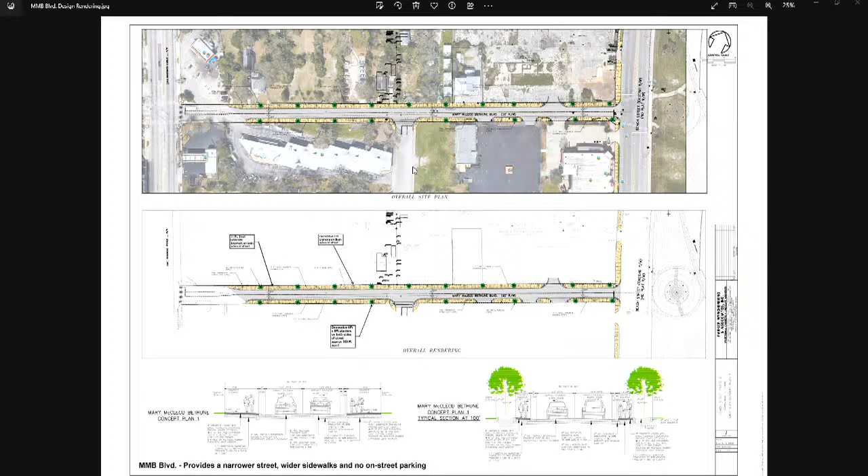Conceptually, this will be a streetscape project similar to what is in Phase 1. One of the big items will be reducing the lanes from 4 lanes as it currently is down to 2 lanes, with traffic calming associated with that. Beach Street will be converted to concrete pavement just like Phase 1.

Additionally, one of the major features will be pedestrian-friendly sidewalks. We're going to look at getting 12-foot sidewalks on both sides of the road, similar to the shell concrete that's in Phase 1 along the riverfront park. We're probably not going to be putting in paving blocks for sidewalks like was in Phase 1.

There will be accents at the intersections with pavers for the crosswalks, at Bay Street and at MMB. And also, we've got a mid-block crossing close to Brown and Brown that lines up with Manatee Island and the nice restroom facility they have right at that location.

One of the other major features of Beach Street Phase 2 will be the raised median island, just like in Phase 1. That was mentioned repeatedly at the public meetings and workshops with Commission, who wanted to go with the raised median island with the opportunity for landscaping. So the thought process is to continue with the palm tree theme from Phase 1, whether those be medjool palms or another type of palm. We haven't finalized that yet. We want to make sure it works with the Riverfront Park landscaping.

One other feature, we're aware of the development at 400 Beach Street. We've been monitoring that and talked to the designers of that project. We're monitoring the submittals as it goes along in TRT. What's going to end up happening is they're probably going to be building first, so we will adapt to what they're doing. We're stopping short of Michigan Avenue, so any access to the parking garage for them will be okay, and we have a median cut through off Beach Street for their parking garage entrance.

We will also be revising the lighting out there. We'll be taking down the existing concrete light poles with the cobra heads and going with nicer FPL lighting, similar to what's in Phase 1, the streetscape lighting along the sides, and there will be some median lights, but those haven't been selected yet. All of the associated poles out there and any remaining overhead wires will come down and be placed underground along this section of Beach Street.

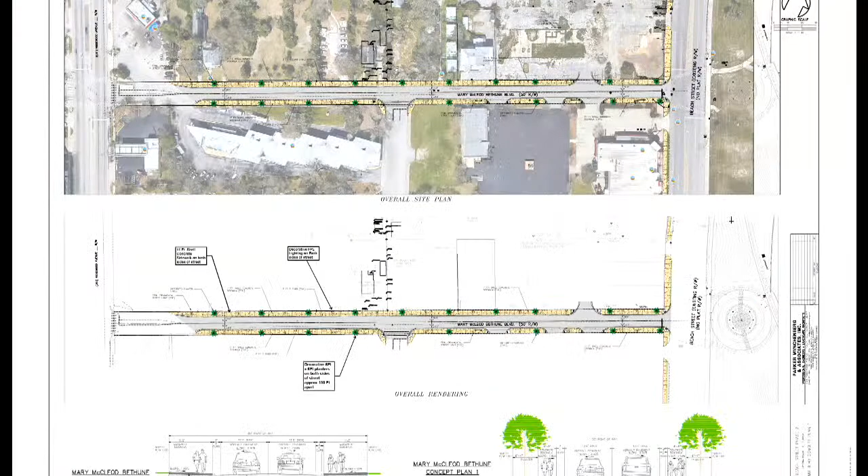So the switch between parallel and angled parking will take place through the intersection of MMB, and the parking count will be roughly close to 170 spots. An early design alternative was considered with angled parking on both sides, but with the room we have, you can't have a median and angled parking on both sides. So you have to have parallel parking on one side, angled parking on the other, in order to have the raised median.

Let me talk about utilities a minute. We will be replacing the storm drain pipe under the road, upsizing it since it's old clay pipe now. In conjunction with the Riverfront Park project, most of the outfalls were upsized, new pipes were installed, and backflow preventers were installed with the hope that it would help prevent some of the high water levels in the river backing up onto Beach Street.

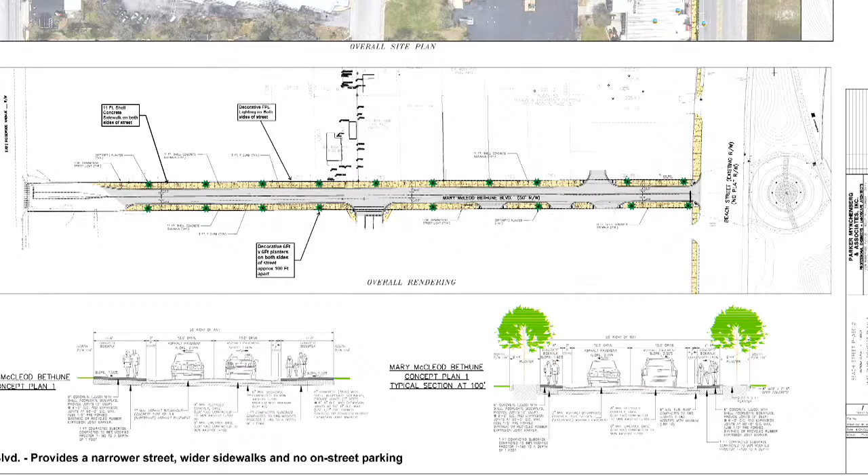There will be some new water main, and a reclaimed water main extension all the way out to Michigan, as well as replacing all the old sanitary sewer services and replacing all the water services.

On Mary McLeod Bethune Boulevard, that is going to be mostly a rebuild. The existing base and asphalt surfacing there are in terrible shape if you've driven down that road. With the heavy traffic, there are failed utilities, and you can see patches all along that road. So we're going to replace the sanitary sewer, replace the water main, and also have a reclaimed main extension from the end of the Brown and Brown property all the way up to Ridgewood.

One of the themes that came up in the public meetings and with the commission is to make that corridor more pedestrian friendly. So what we're going to do is narrow the travel lanes. They're like 18 feet now, and we're going to narrow them down to 12-foot lanes and have wider, 11-foot sidewalks on both sides of the road to hopefully be more pedestrian friendly. Those sidewalks will also be the shell-infused concrete like I was discussing earlier.

It will also have improved FPL lighting, decorative lighting alongside the road. There's not a lot of opportunity for landscaping, but we're going to try and put in some tree wells, perhaps every 100 feet, to get some landscaping installed. We're a little constrained on that, but hopefully it'll give at least the effect of a tree-lined street.

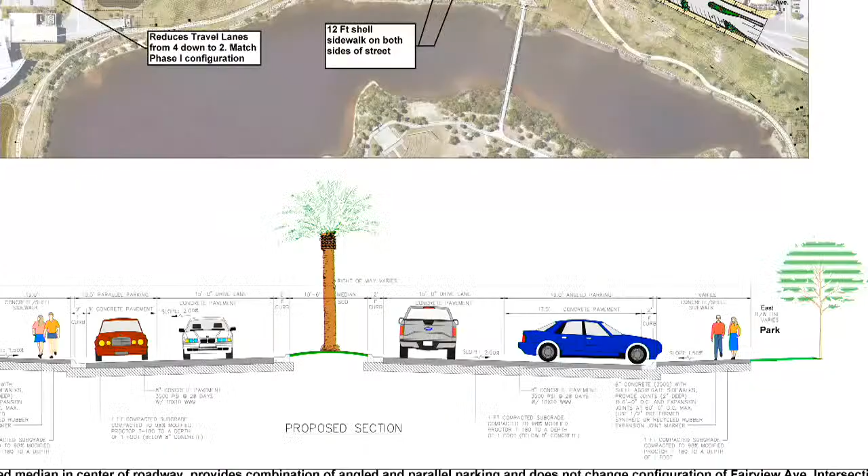Mr. Chair, John brings up a good point, though, because we have a lot of skateboarders and bicyclists riding down the sidewalk. So if there was an access point or a lane available for bicyclists or skateboarders along the highway, that would be an alternative to get them off the sidewalk.

Because I can imagine, going with a wider sidewalk now, the skateboarders and bicycles, and scooters too, electric scooters, are really going to take advantage of it. Part of that, I know it might be called something else now, but the Sweetheart Trail that was further south on Beach Street that they put in will come up to the park area.

Then it'll kind of circle around, taking them not on the street but through the park, and they'll end up on the other side after completion of the project. We'll take them all the way up to Ballough Road, I believe. That is a bicycle and pedestrian facility that goes along South Beach Street, up to go down Orange, past City Island, and up that way.

I was going to sort of piggyback on John's point. I was thinking the same thing about the bicycles, not necessarily for recreational use through the town, but a lot of people are using them as a means of transportation in downtown areas when they're vacationing here—renting bikes or getting bikes to access the businesses. So if there's nothing available for them to access the businesses via bicycle or scooter, it seems like we're missing an opportunity.

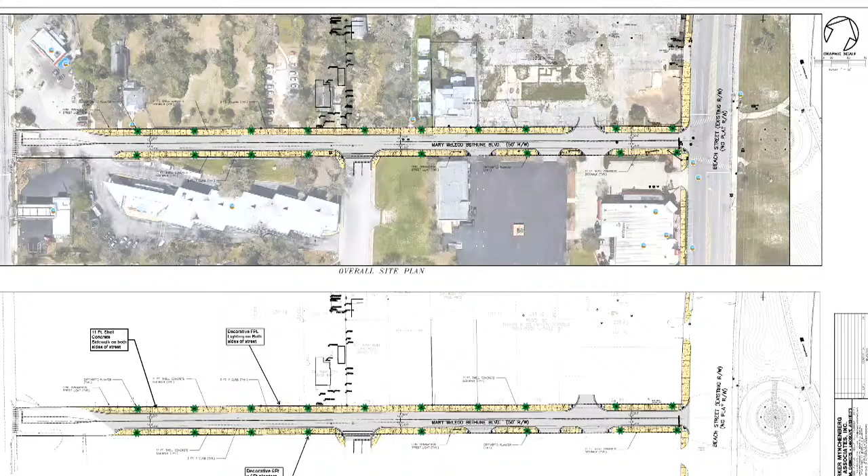I'd have to get the specific location on that. 202 Dr. Mary McLeod Bethune Boulevard. 202? Yes, okay. What's the width of a parallel space? 10 feet? Yeah, because you've got your planter at 6'4". That'd take up the entire planter and the concrete walk on that side.

I was looking at the sections trying to figure out the difference between the two, and the one on the right is just where the trees are. Correct - if you look at the plan view, there's a green overhead view that represents the planter at that particular point, and it could be shifted or adjusted. I'm sure that property owner will do quite a bit of landscaping out there to complement your plan.

All right, well that's good information to know. We'll plug that in and see what's possible. Okay, great.

Is the Sweetheart Trail accessible to all the bikes now? With the construction, they've had to put a fence so that the homeless won't be in the park when they come in off the Ballough Road area. But is there a fence they have to get through to get the Sweetheart Trail up against the river? Right now it just dead ends into the Main Street Bridge, and there isn't really any way to get across Main Street to go further north. If it dead ends there, can you get out that way, or is that where the fence still is? Yeah, it comes out onto Main Street.

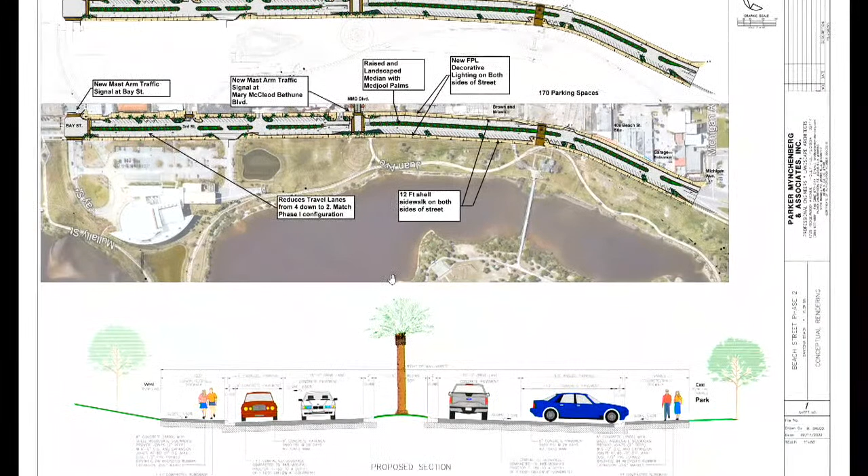Mr. Chair, I have a couple items for Mark, and for the board to also think about in this design. Let's talk about streetlights first. So we're going from the Cobra heads to what? What's going to be the design of the streetlights on Beach?

It's going to be similar to Phase 1, with decorative sidewalk lights and median lights. We'll have some kind of overhead lighting, probably LED. The final selection hasn't been made, but it's probably going to be a newer looking LED light, and the pole selection hasn't been made either, whether it's a black pole or the standard concrete pole.

The poles would be pretty important for downtown, not like the poles out on Ridgewood or other heavy travel areas. What happened on Phase 1 was those were city poles, so we kept the poles and just got new fixtures. Here, we're going to have the option of new poles and new fixtures, so we can select them.

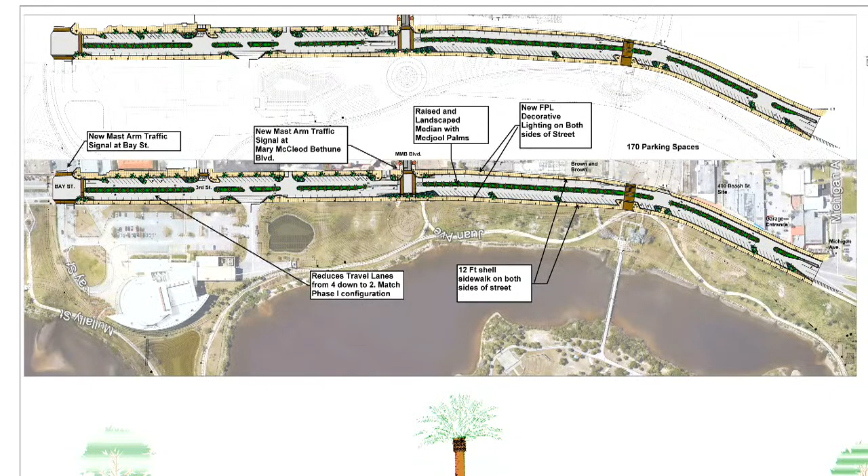Were those active when they flooded most recently, or was that before that? I think they mostly installed before the previous flood, the last storms. So not super effective is what I'm getting at.

Well, there's probably some outfalls that are unknown, and it just routes around.

The opportunities, we looked at potentially raising the level of the road, but we're so locked in to development on both sides of the road that the opportunities are kind of limited. The amount we could raise the road is very limited and still get back to the park elevation or ground elevation. We can't be so high that we'd be tying back into the park somewhere.

That doesn't help you out with flooding anyway. No. So I think the area near the fishing hole would probably be looked at in terms of the whole North Beach, Ballough Road, Fairview intersection when all that is studied. But this would be the one, if we wanted to talk about Bay Street, would be with this project. Bay Street would be with this project, yes.

So is everything downstream of that capable of handling it? Once you upsize this section, is everything after that going to be compatible? Is it going to be large enough to handle the flow?

They upsized the pipes and rearranged them in the riverfront park downstream from that. Upstream from this, I don't know what utilities has planned in terms of storm drain upgrades, but in the park project there was a clear effort to upsize the outfalls, and some of the backflow preventers, I think, were installed before the park got there, and some when the park was constructed. But they did upsize the outfall pipes—a lot of them were like 12-inch, they went to 30 and things like that.

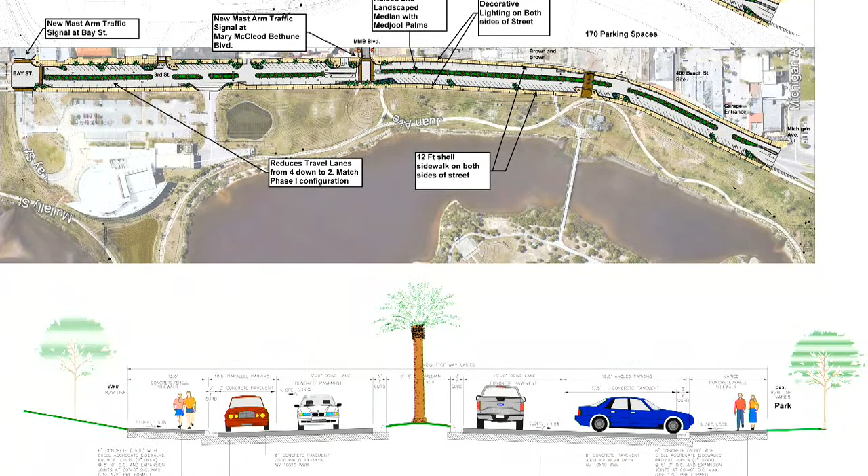That's still a problem foundation-wise with the arches where we have it located. There's a lot of storm drain structures and boxes there causing an issue. So we have a design for the arches, but it hasn't been fully vetted whether we're going to put them in. Part of the thought is it's one arch, way down at the end of the project, pretty isolated from the other arches. Is that aesthetically a continuation, or is it better to just stop the arches where they are and have the mid-block crossing?

That decision hasn't been finalized. Will there be any kind of pedestrian warning lights to stop traffic so you can cross? We will have the flashing beacon lights like in Phase 1, where the pedestrian can hit it and the flashing lights go off. Yes. All right, thank you.

And you said it's about a 15, 16-month project? So obviously if the funds aren't in this budget, are we thinking maybe 2025? I mean, you're also saying you're waiting for the 400. So they've got like 2 years to get their funds together and everything? Is that what was in the approval for them, before they pulled permits and had to start building on the 400?